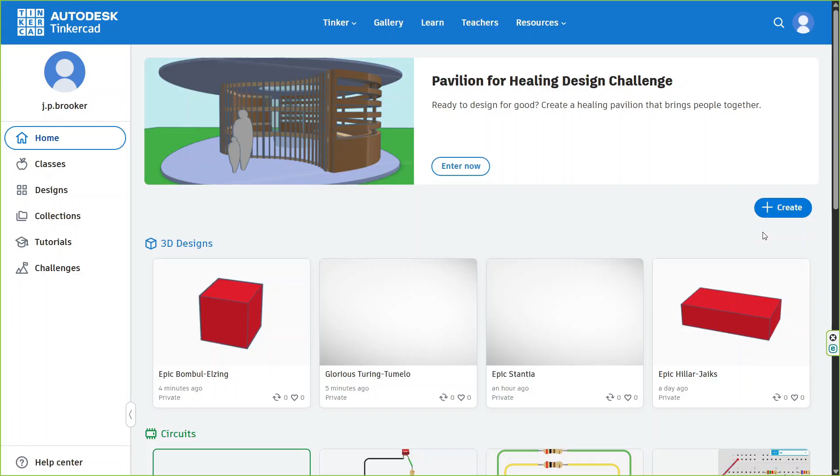I'm going to get the red cube and drag it onto the work plane, go to the bottom right square, type in the depth, which is 48, and the breadth, which is 113 millimeters.

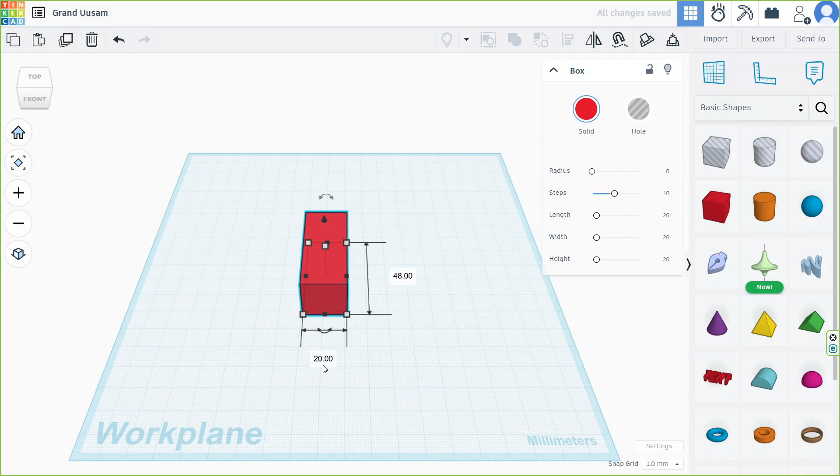Then I'm going to go to the center square and put in the height, and the height in this case is 34. So I'll just shift that back a bit.

Now I'm going to select it again and duplicate it. Just click that duplicate button once and then pull away the duplicate.

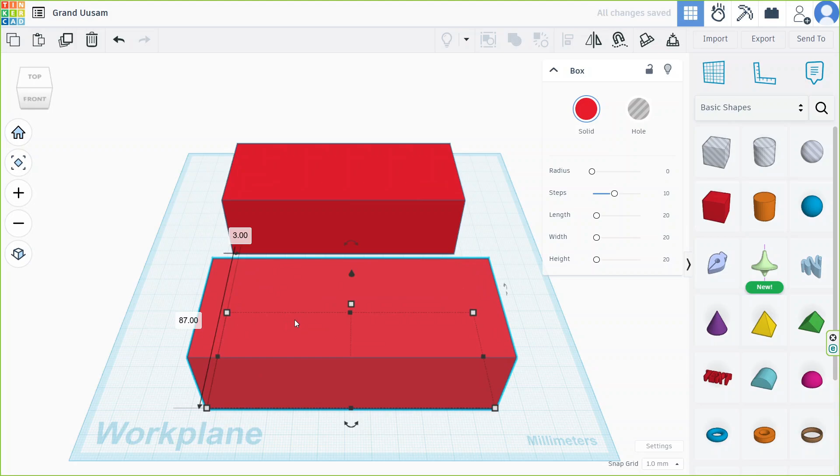Now I want to subtract from the horizontal dimensions for the wall thicknesses. So that 48, I'm going to subtract 8, so that comes to 40 millimeters. And the 113, subtract 8 from that, so that comes to 105 millimeters.

And then I'm just going to subtract 4 millimeters from the height. Sorry, I'm going to take 8 millimeters from the height there.

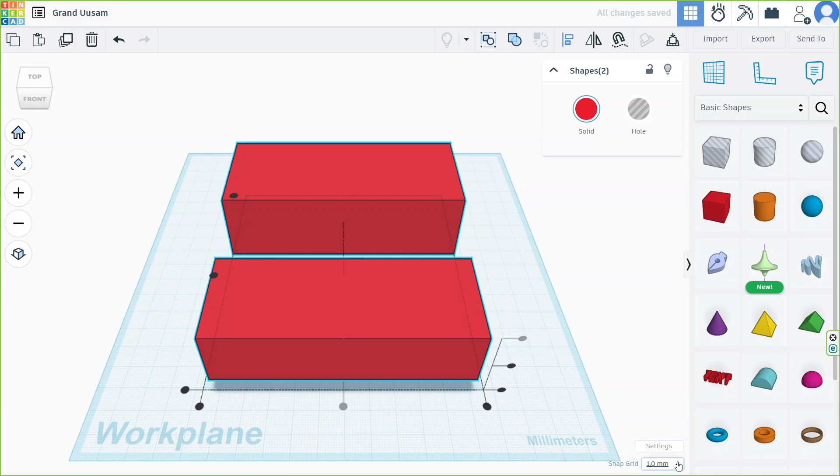Now I've selected both of these, and I'm going to click the align to put it in alignment mode. The first thing I'll do is align them vertically at the top. Then I will center them in one horizontal dimension and then center them in the other horizontal dimension.

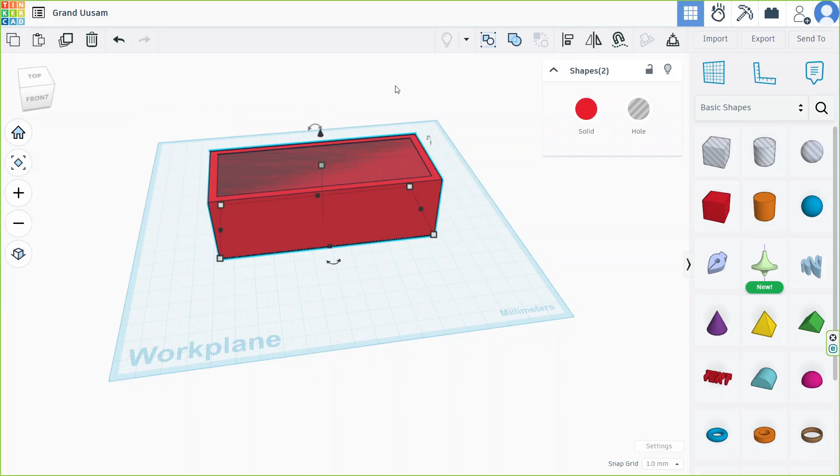Now what I need to do is set the inner box so that it's a hole as opposed to a solid. Then I'm going to select both these components together and click on the union group. Now I've done that, it's combined the two, and so you can see we've got our complete box now.

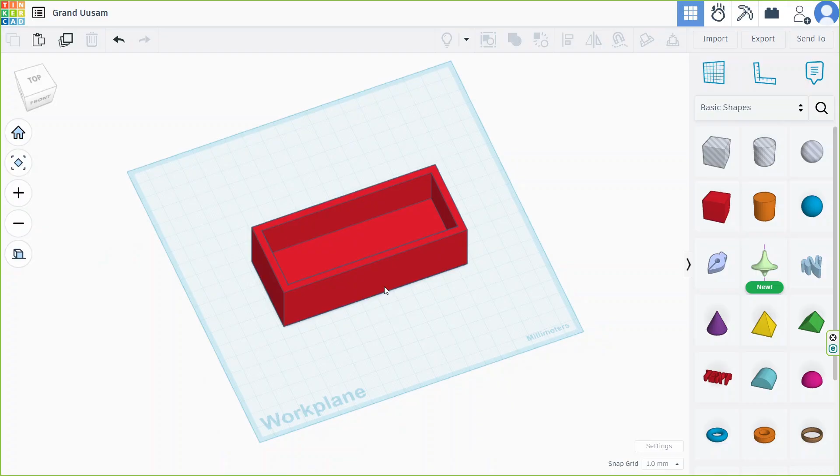So next we're going to go on and do the lid. I've just changed into orthographic mode, that doesn't make much difference.

Again, I've dragged the box on, and I'm going to set the depth again to 48, and I'm going to set the breadth again to 113.

But now I'm going to go to the center square to set the height again, but this time the height is going to be 4 millimeters because it's just a thin lid.

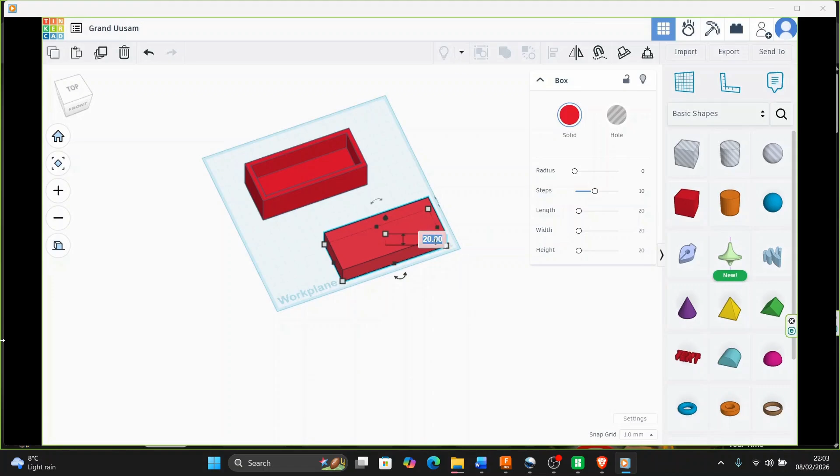Okay, now as we did previously, I'm going to select the component and then go up to not paste, but duplicate, and pull the duplicate away. Then I'm going to resize the duplicate to remove the wall thicknesses, so that becomes 40 and the 113 becomes 105 again.

But this time when I go to the center square to set the height, I'm going to set the height to 8, so it's going to protrude 4 millimeters above the other component.

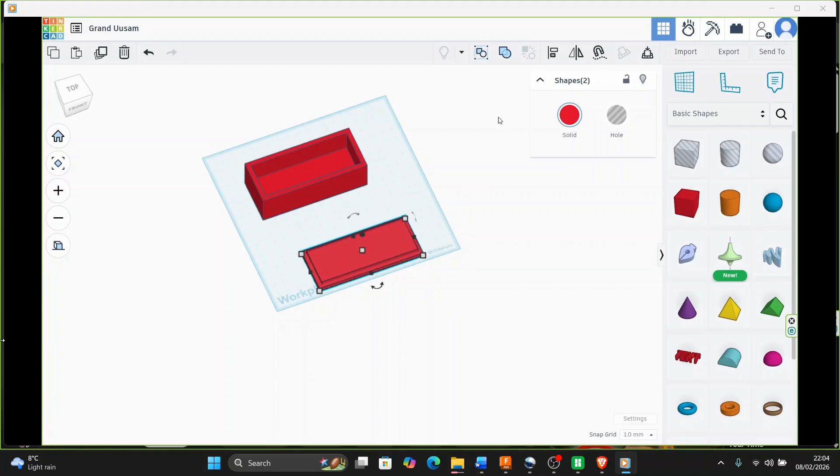And then, as we did previously, I'm going to select both components, click the align button to put into alignment mode. In the horizontal dimensions, I'm going to center it, and in the vertical dimension, it's already as we want it. So all I need to do is just combine these using the union.

So now if I try and move that, it moves as one independent piece. So that is our complete box and lid.

So now what I'm doing is just an STL file export of this. STL is a very common format used for 3D printing and CAD systems, one of the most common formats for exchanging data.

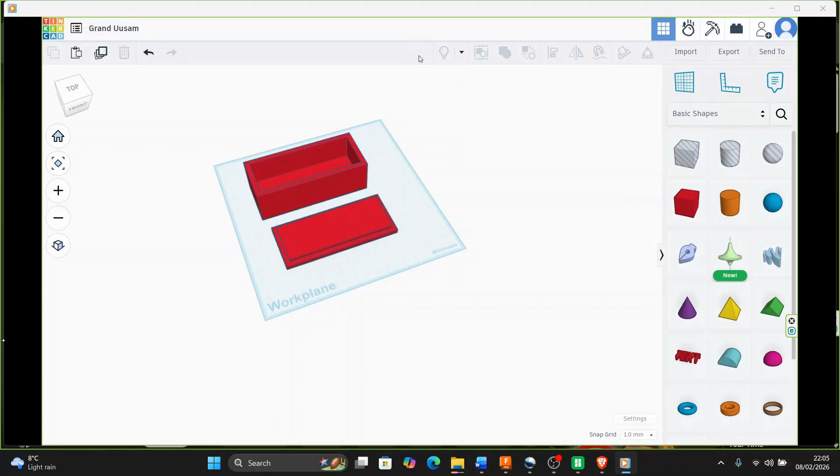So this is the Bambu Labs software for the Bambu Labs printer, and I'm going to go into import, and import that STL file that was just exported from TinkerCAD.

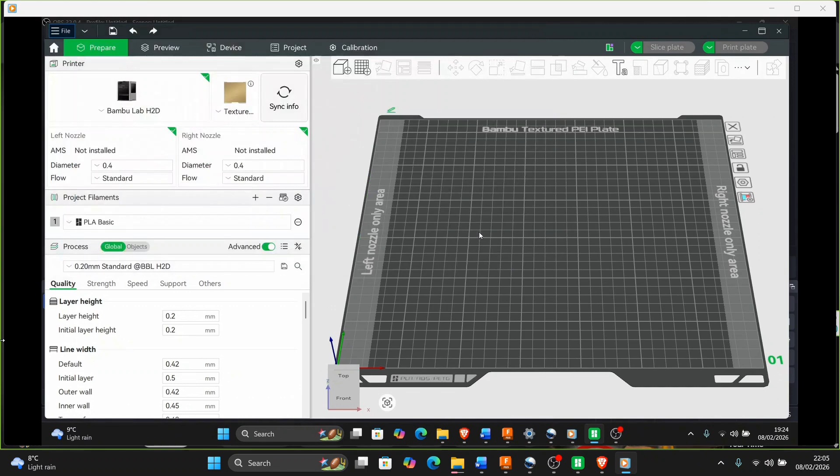There we are, so we can see that down on the workplace. So I'm just going to do a slice and it's ready to print.

So if I click print plate, it will send the instructions to print it across to the cloud to wherever the 3D printer is located.

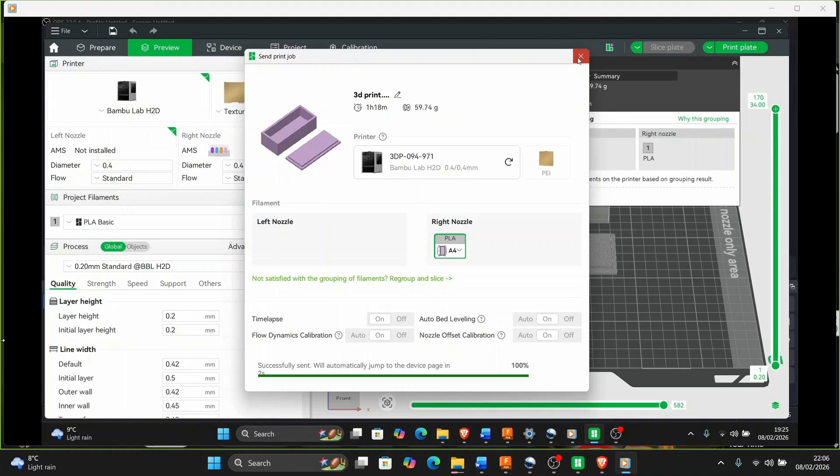And if I go to this device setting now, I can wake up the camera so we can check that, yes, the bed is moving about.

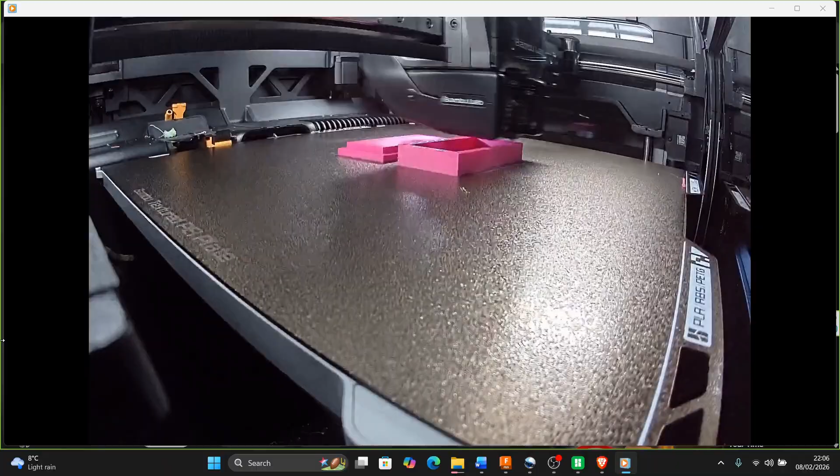So there it goes. This is a speeded up video of the box being created. That's the finished result with the lenses in it.

But the important thing is how well the lid is going to fit on it. So let's give that a go.

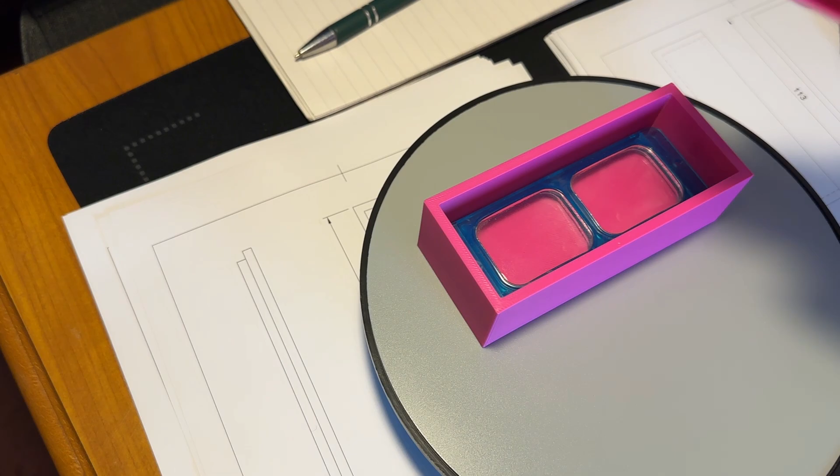Well, that fits on pretty well, but oh dear, not very easy to get open.